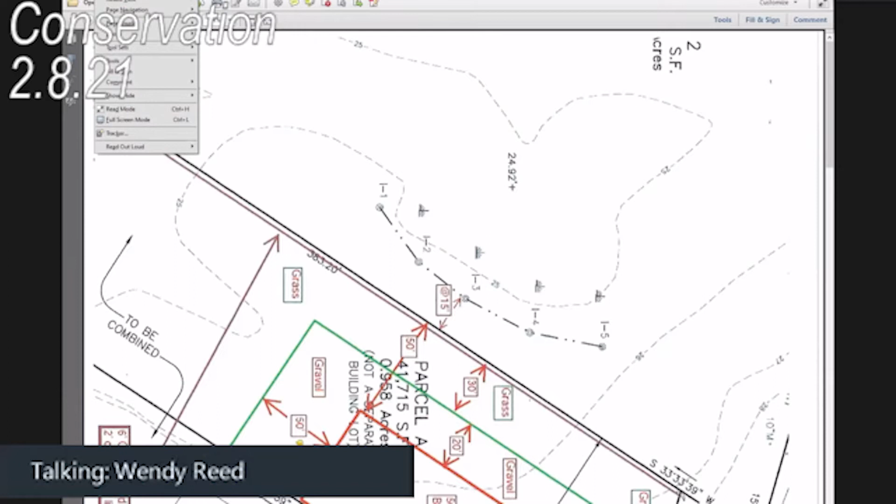Is there someone here for that? No. Is there someone here, Bert, for doing this, presenting it? I don't see, it was submitted by Tracy Peter. I don't see her on. Rotate this. Do you want to take whatever's next and see if she? Mark Peter was on. I don't know if she's. Tracy Peter here. Yeah, hello.

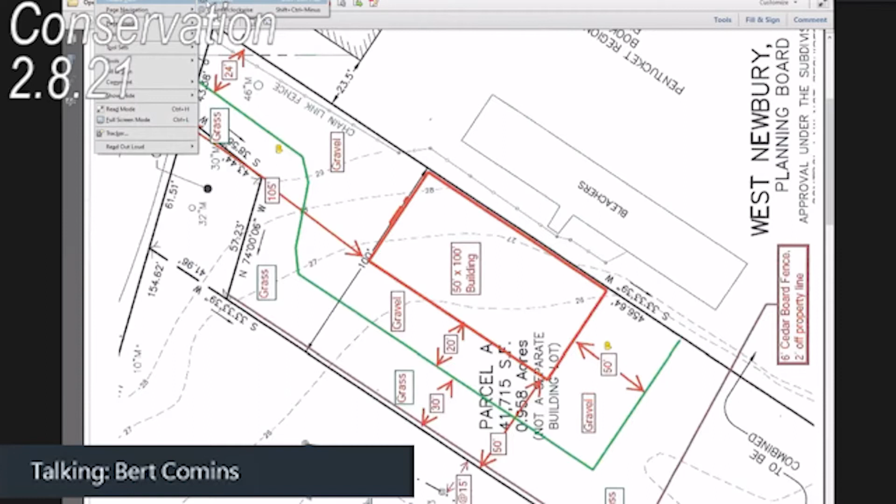Hello. Hi, Tracy. How are you, Dawn? Good. You want to give us your presentation?

Sure, thanks. Well, I'm representing the Pentucket Regional School District regarding the construction of a maintenance garage on property located on, hold a second, I'm surprised I'm first. I thought I'd have a little time to set up my plans. Well, everything in front of you got continued. Well, that's good. Yeah, we'll be out quick. Good for you.

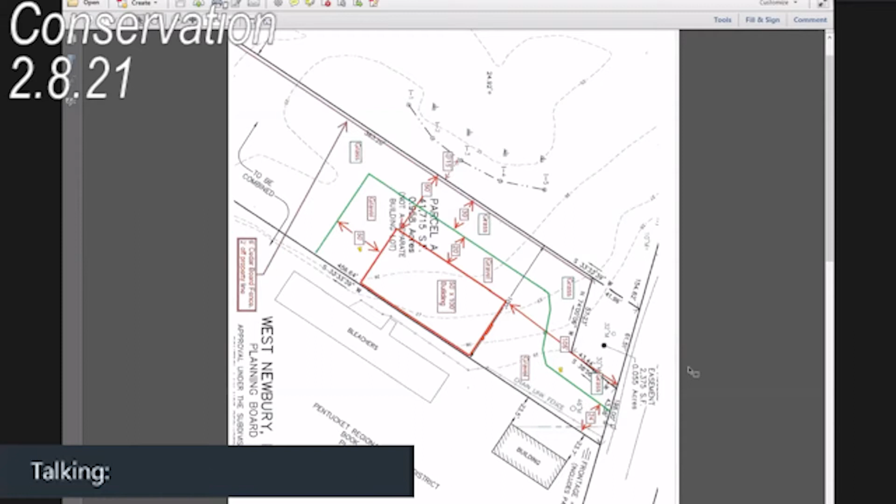So there'd been a land acquisition on Farm Lane so that it's contiguous with the Pentucket Regional School District now, and it's parcel A. There'd be a 5,000 square foot garage constructed at the top of the lot, meaning closest to Farm Lane, 105 feet from the road. I did an analysis of the resource areas within the jurisdiction of the Wetlands Protection Act.

The area is outside of any jurisdiction. There is a small area of possible spring to the west of the proposed garage. Is that marked any place on this plan? Yes, that's the area that's marked 1, 2, 3, 4, and 5. It's kind of like a depression. Hold on, it's to the side. Oh wait, I see, you see the delineation? It was done by LEC Environmental.

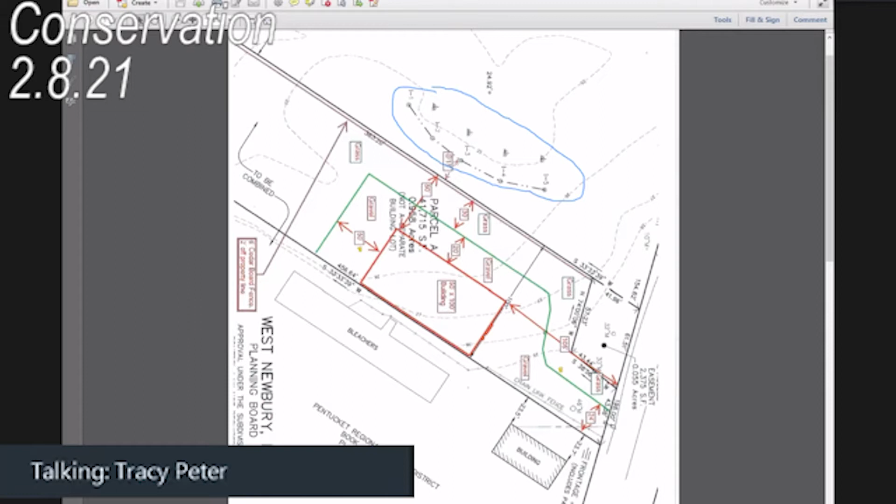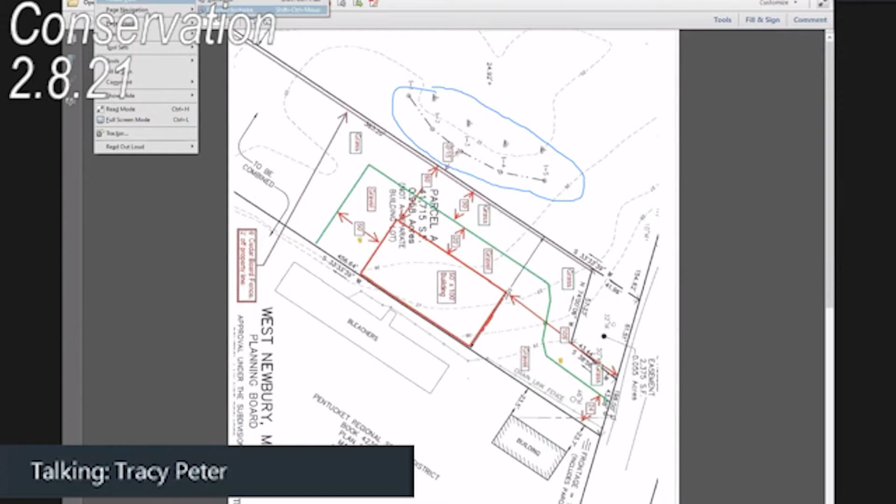And I also, there were 2 sets of plans. I think you have the most recent one. Can you rotate that 90 degrees, Bert? So I have a question about that, because this was the one that was first submitted, and it seemed to be a lot more detailed than the one submitted later. The one shown on my screen is the second plan, and it shows where the roadway would come in, and then you'd go, and it looks like it's in green ink. Yes, green ink.

Coming around the property. So from the edge of the building, you would have 65 feet from the edge of a wet area with some vegetation there. And after putting in the little bit of gravel driveway, it would be 45 feet. The property line is 30 feet from the gravel way, and there will be a fence placed between the property line and that area.

Is that 15 or so feet? What kind of fence, do you know? Stockade. So will there be excavation for the post? Well, yes, there would be. It seems like that should be part of the plan.

I was going to say, shouldn't we have where the fence is going to be on the plan? The fence location is on the plan, isn't it? Yeah, is that what that, okay. Brown, yes, it's hard to, it's the brown line next to the property line. I added this plan the day after I had been, it was sent to me, and it was omitted in the original filing. It came to you the next day.

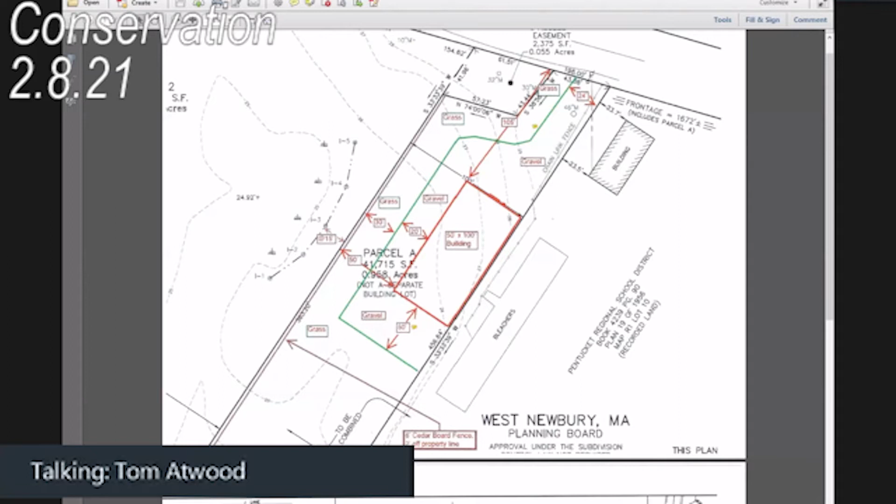It lowers the water runoff. Part of the plan too would require, if it is a paved area, how do they handle the runoff so it doesn't adversely affect that wetland? I think Tracy's question is, if it's not a jurisdictional wetland, do you have anything to say about it? Well, exactly. That's very true, Judy. So I guess we could address that as well, depending on what the outcome is of the ILSF. Okay.

So shall we continue this to the next meeting? Has anyone been out to see it, really? I went out with Bert. Who else has gone? How long ago was that though? Bert, do you remember when that was? It was cold, and I think it must have been over a year ago. I think it was last fall.

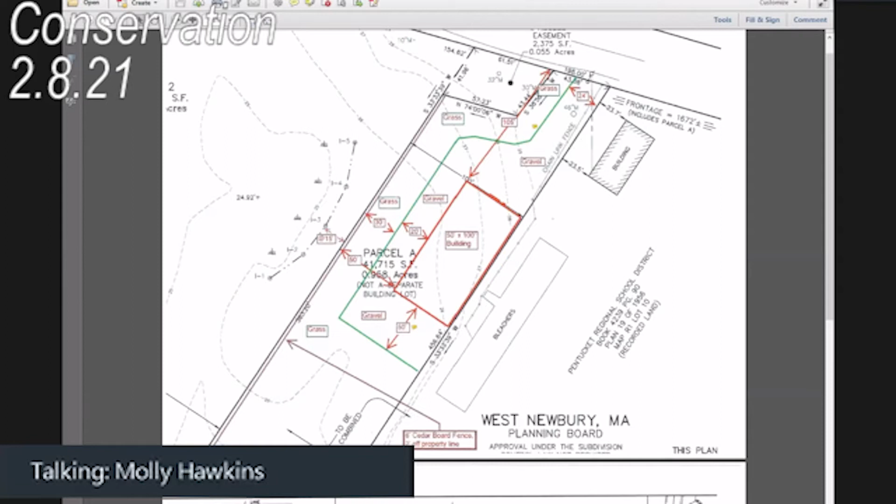It was spongy to walk on, but there were places that were like little frosty, so it had to be in the fall. Yeah, I don't think we were wearing masks yet, so it was over a year ago. What is time? Yeah, and I saw that late fall - not over there, I think I met him on the other wetland line. I don't think I met him over there again. I remember meeting him. All right.

Do you have any other issues or concerns about any other resource areas? Well, I guess we'd have to look more closely and compare this to the other delineations that we have, which we haven't had an opportunity to do, to see where it is in location to any of those. Okay.

So are we going to go ahead and have us take a look at that area to see if it would be considered ILSF, and then wait for the site visit with the commission, or visit right now? It's too much snow. Right, so as soon as the area thaws, we should try to do the calculation. We'll have to revisit the delineation and any calculations we need to make. Okay.

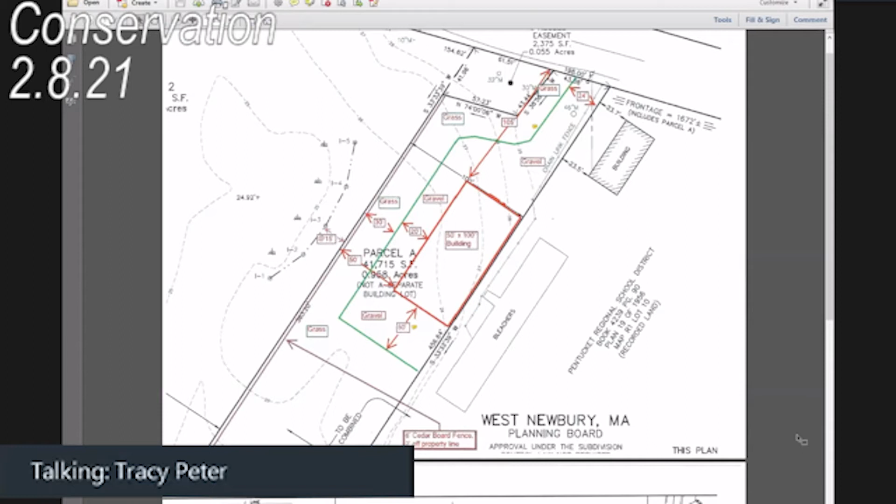All right, so we'll see you then, I guess. All right, thanks. Thank you, Tracy. Thank you.

All right, next is a request for a certificate of compliance for 70 Ash Street. Which one is that? Ash Street, this was 70 - this was at our last meeting too. This was the one about the question over the underground propane tank. Oh yes, yeah.

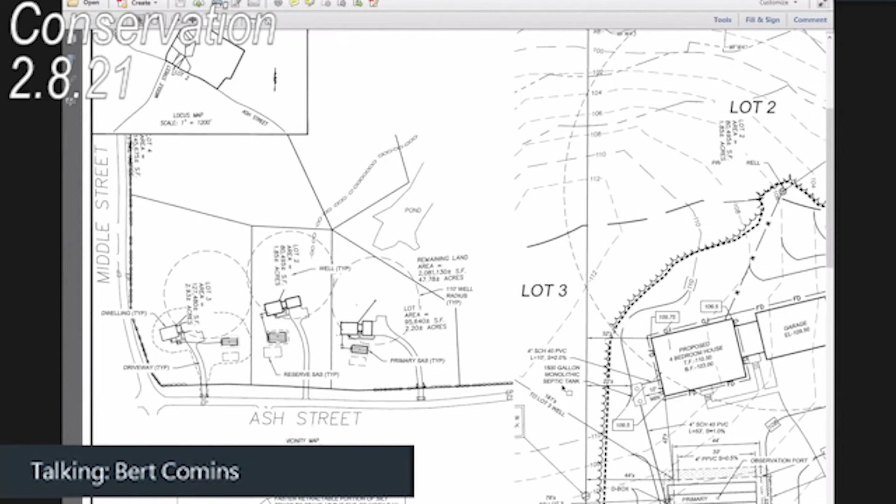Let me pull up the as-built. So is there any resolution with that? Did we get any information? I looked into it, and everything I found said that it doesn't really pose a threat to contaminating groundwater, which is what I was really looking at.

Where is it here? This isn't the right one, Bert - this is Denis Hamel on the line here. You got to look at the final as-built plan that we submitted. Yeah, I pulled up the wrong plan there. Is that what you had up, Bert, the final plan? No, we have the design plans up there. We need to look at the as-built. Yep.

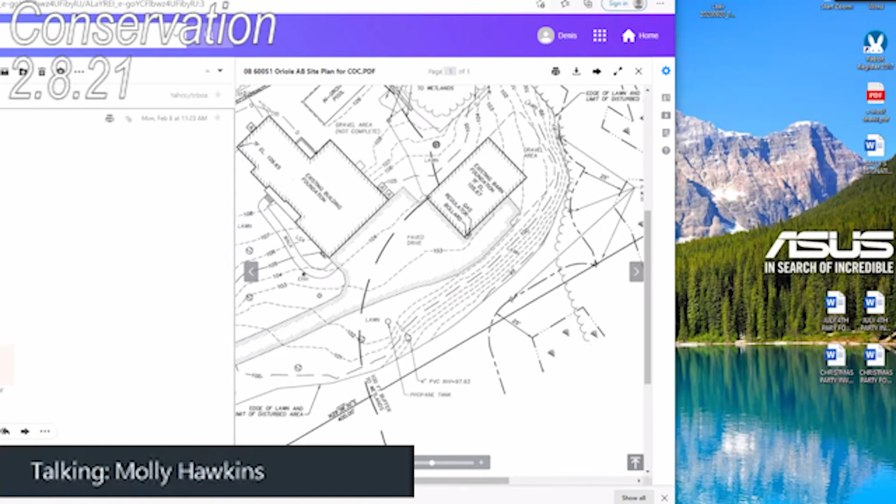It's approximately 75 feet from the wetlands as well, this outlet right here. Here's the 25 foot right here, so that would be 50 right about in here. So it's about 60 feet maybe. Well, more, I'm using a scale on the plan that you submitted, and it's like 70 from that point to the wetland. Because here's 100 and his 50 would be right about halfway. So yeah, it's less than half of that way. So yeah, it'd be 70 feet or so from there to there.

So the plan does show a proposed foundation drain. It's actually on the plan, it's actually more in line with the front of the barn. Goes out in this direction.

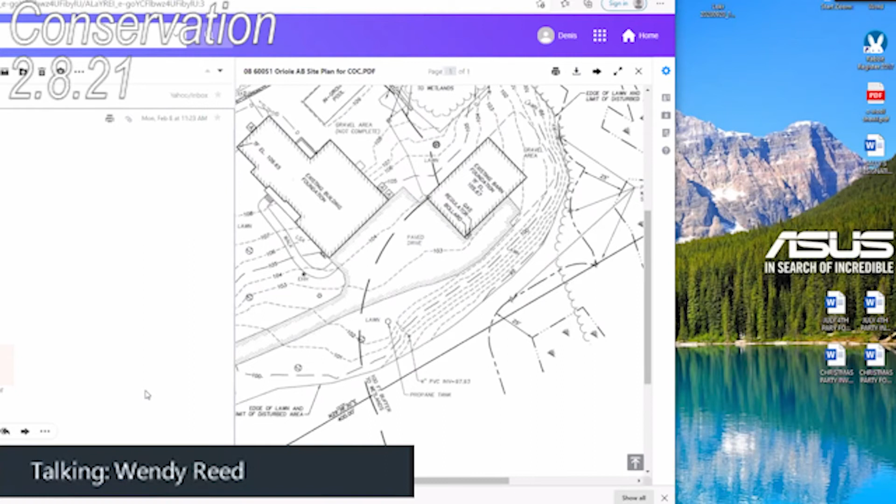So Bert, you're saying the outlet is more in line with the barn, or the drain itself? It would be, it just says proposed foundation drain, but it would be the outlet. And it is closer to the wetland.

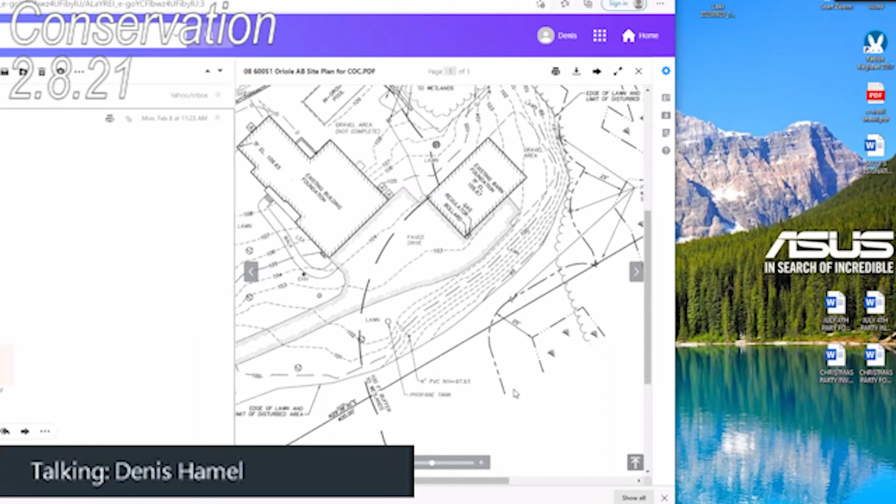The proposed drain is closer to the wetlands than this one. As you can see along this, where it says the lawn area, that steeper slope, that's a fair amount of fill that was in there. This is where it matches existing grade, then comes up to here. So there's not a lot of flow coming out of there because it's not really below the groundwater too much. Maybe up in this upper corner it might be, and that's why you wanted to try and get it up. It's very typical to have a footing drain even if you're not in the water table, just to give you that added piece of protection.

And Bert, you said that all of the posts were where they're supposed to be? Yep. Everything else is properly vegetated? Yep.

Well, based on the research that the propane tank does not pose a hazard to the wetlands, and that the changes, the variances from the approved plans are not more intrusive than the approved plan, I move that we issue a certificate of compliance for DEP file number 78675.

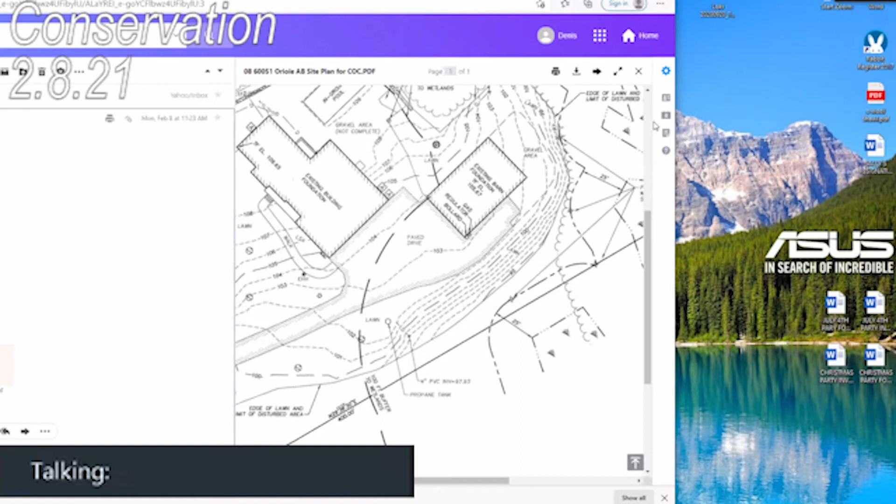Second. Any further discussion? Dawn? Aye. Molly? Aye. Wendy? Aye. Tom?

Aye, sorry about that, I was on hard mute. Aye. Judy? Aye. Denis, could you just make me the host again? You put your cursor across my screen, click the 3 dots. Okay, hang on a second. Let me, right here, make host. There you go. Got it. Thank you.

Thanks, Denis. One question I have for you, I noticed on the agenda, the Chris Harris on 171 River Road, we had asked a COC from him as well. I'm wondering why it's not on the agenda, or if it is on the agenda, it just didn't get posted. Because we haven't gotten the information from Heritage, right?

So Chris had emailed me. Heritage said that the anchors and the rocks there were fine, but the chains were not. They needed to be the flexible rode system. So Chris had asked me to put this off until the spring so they can show that they're using those flexible rode systems.

Okay, I just wanted to make sure. I'm not going to, I'll leave the site if I'm not going to be here to listen to anything else. So that's the reason for my question. Yeah, so if in the spring's not a problem either, once they're installed we can go out and verify that they're there, take pictures and send something to you, and then you can vote on it at that point.